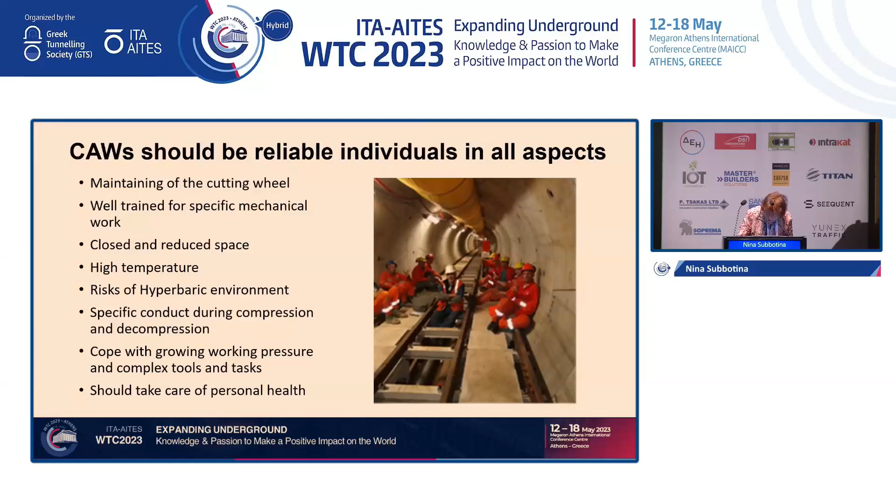In the Riachuelo System Project, Ghella implemented a package of good practices for dry hyperbaric environments that included medical and safety procedures, detailed workers' health studies, vital signs, cardiovascular parameters, and psychology, as well as the records of bubbles in the blood after surfacing in high-pressure interventions.

Why is it important? It is important because while the quantity of circulating bubbles is low, the risk of decompression sickness is also low.

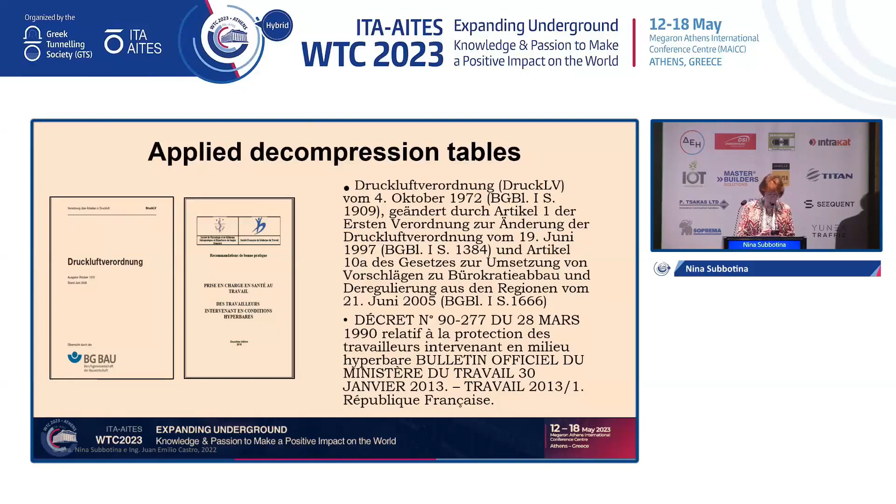In Argentina, for the first time, the German and French hyperbaric protocols were applied, which had not been applied before. Here are the protocols mentioned. So, to justify the use of these protocols and their convenience for application in local environments,

the Doppler bubble registry was used. Echocardiograms and Doppler scanning of the precordial and subclavian zones were analyzed using the Kisman-Masurel score, shown here.

This score ranges from 0, no bubbles observed, to 4, bubbles fill the entire space of the heart chambers. In this video, you can see the heart, and there are some bubbles visible. Those bubbles are grade 2, only grade 2. But the quantity of bubbles is calculated as acceptable when no more than 20% of the bubbles are grade 3.

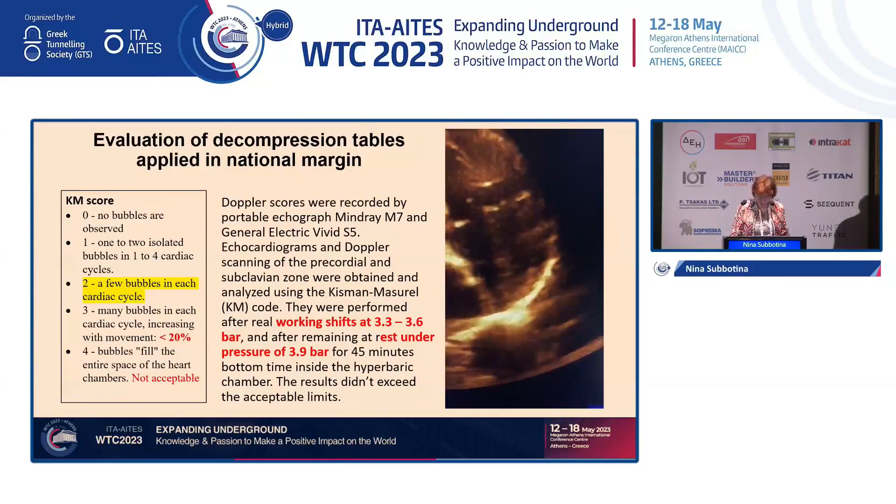Here are the results: average values of vital signs before and after the intervention, and the number of observations. You see that many observations were made. We see that the blood pressure, systolic and diastolic, is slightly lowered after the intervention, and the heart rate slightly increased.

But look at the difference - it is statistically significant only because of the great number of observations. The difference between 120 and 116 millimeters of mercury is 4 millimeters of mercury, which is less than the 5 millimeters considered within the margin of measurement error. So it's statistically significant, but practically, physiologically, it is not important.

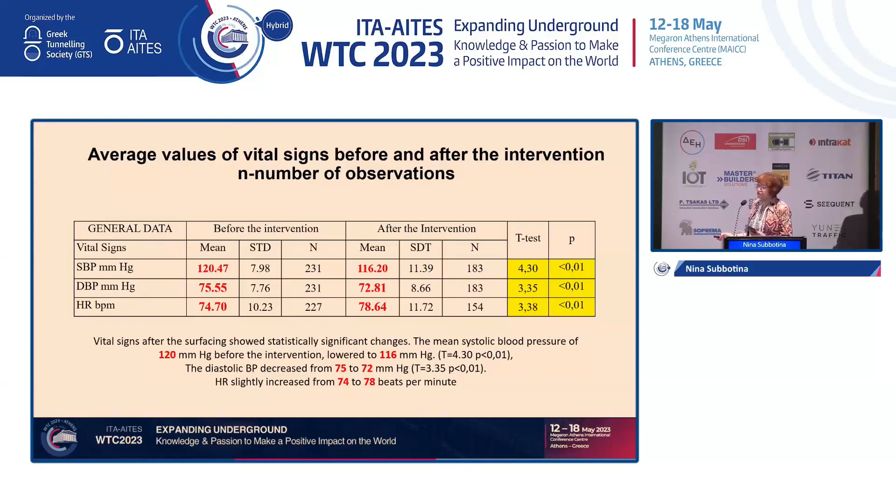Also with the heart rate, increasing from 74 to 78, this has no important physiological significance. So our first conclusion is that the safety of the working environment and the organization of the working schedules was proven. All the physiologic and psychological parameters of the compressed air workers were perfect.

Our experience was analyzed and we wrote it up, presented in these books, one in Spanish and another in English, both available on Amazon.

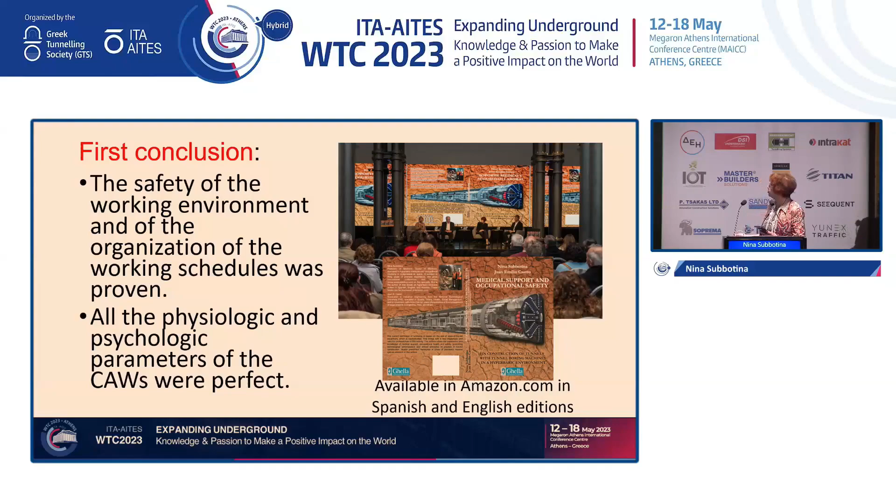We should compare with other studies about the cardiovascular system response to high pressure, but we have not found any data of a similar situation. There are many publications of other working situations, for example in aviation and other types of work, when the work is very stressful and demanding.

So we analyzed two parameters, the duration of the intervention and the pressure. Here you see the total time of intervention: 2 hours, 4 hours, 6 hours, 9 hours. We see that the total duration of intervention didn't show us any differences.

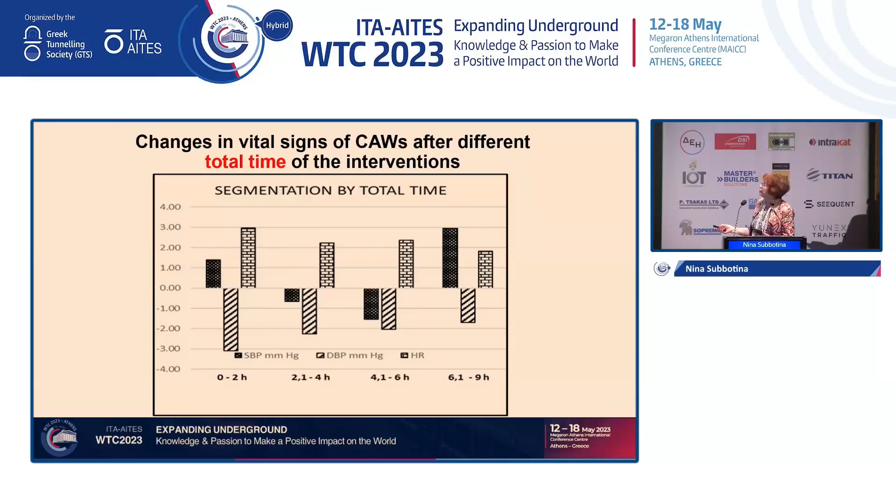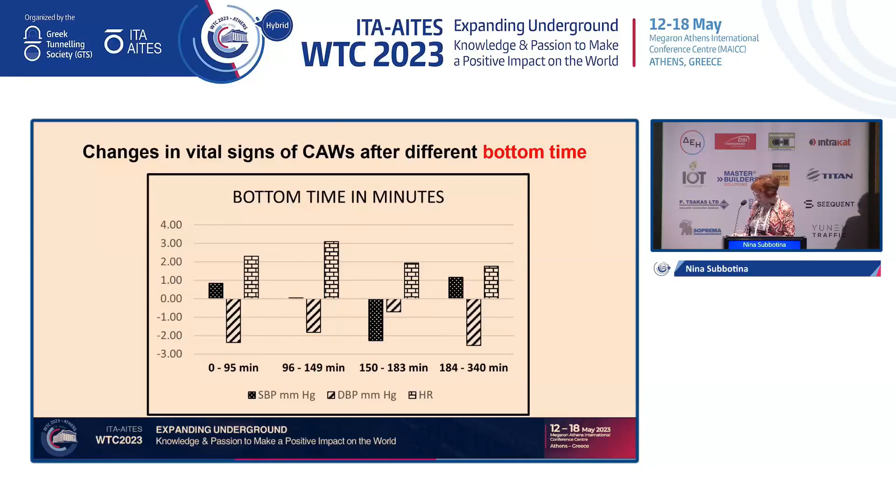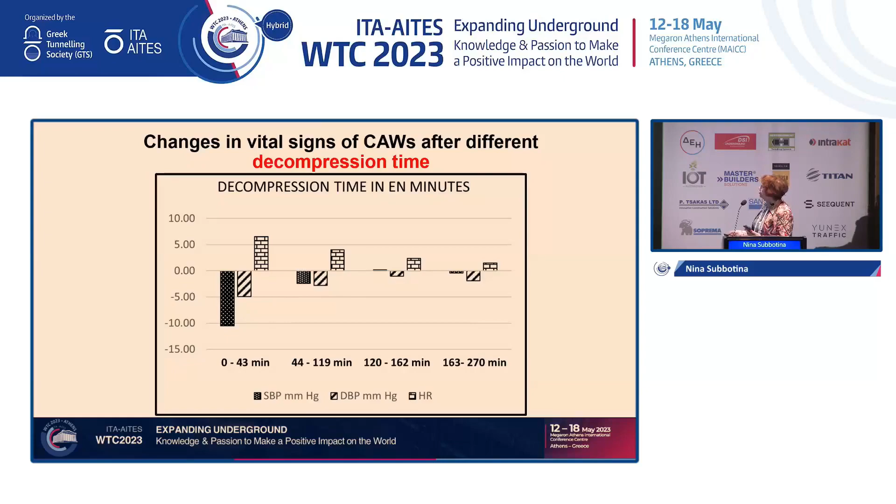The same with the difference of the bottom time - no difference, as we saw in the main slide. But decompression time showed that with less time of decompression there were more changes, and with the most time of decompression, the changes were less.

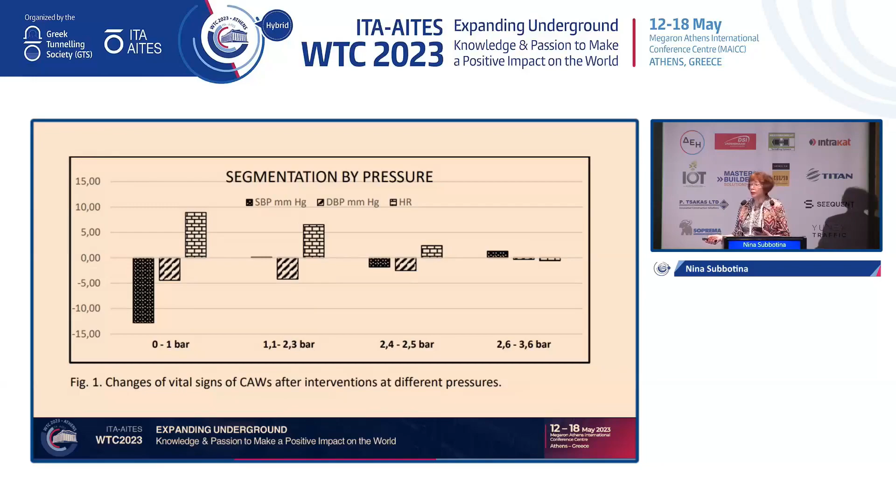And here I put the segmentation of pressure. We see it's the same as the duration of the compression time. Effectively, they are closely linked.

So how to explain it? How does the cardiovascular system respond to high pressure, and which criteria should we apply? The stroke volume and cardiac output parameters are used to characterize working conditions in different demanding and stressful situations.

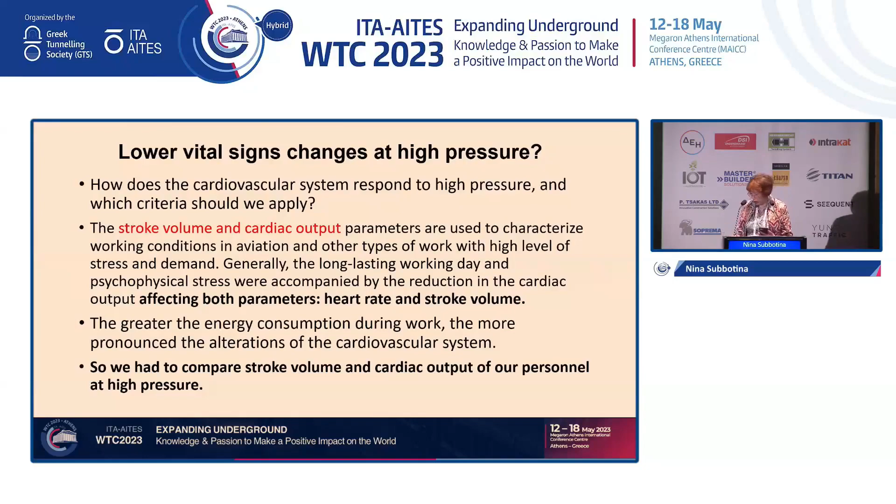It's important that the greater the energy consumption during work, the more pronounced the alteration of the cardiovascular system. So we had to compare the stroke volume and cardiac output of our workers in the different segments of pressure. I will remind you that stroke volume is the volume of blood pumped out of the left ventricle of the heart during each systolic contraction, and cardiac output is the total blood volume pumped from the left ventricle per minute.

According to the bibliography, a long-lasting working day and psychophysiological stress produce a reduction of cardiac output, affecting both parameters, heart rate and stroke volume. But in our group of workers, only 1 of 16 showed a similar reduction.

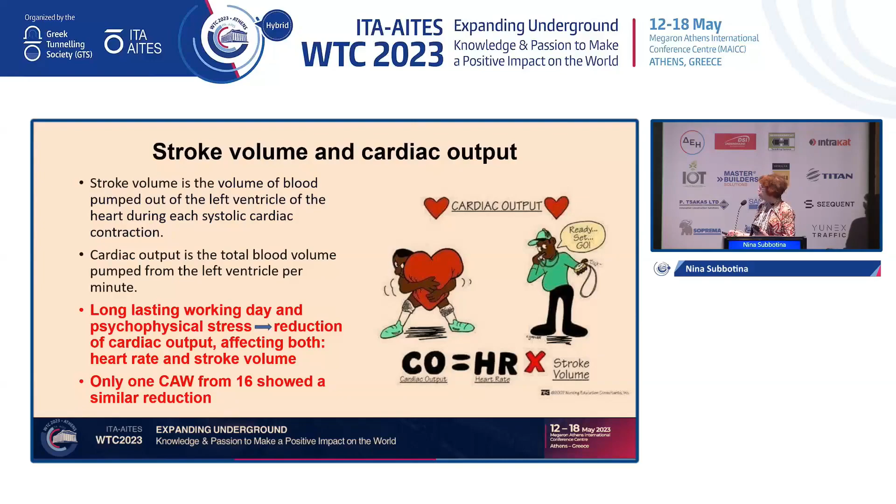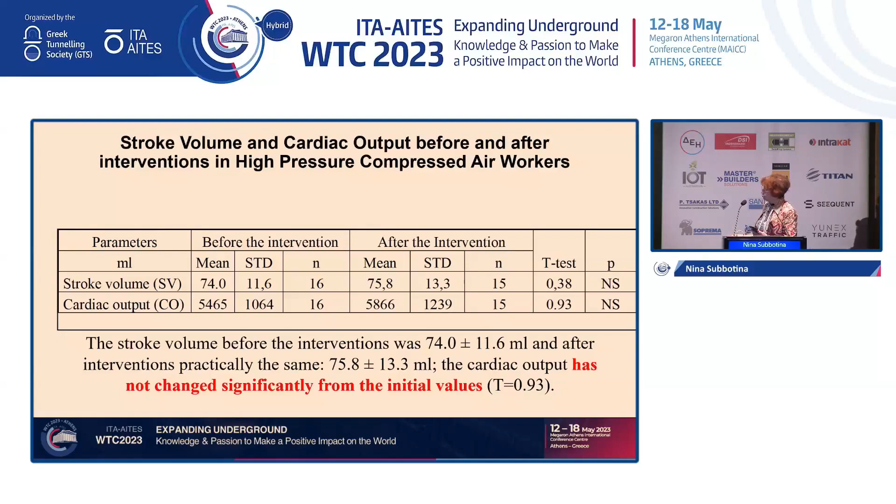Here are the data of the stroke volume and cardiac output before and after intervention of all the group, of all 16 persons. We see that the cardiac output has not changed significantly from the initial values.

What about nitrogen narcosis? Probably it was due to euphoria caused by nitrogen narcosis. The mood registry was done after decompression, but the physician observed the behavior of the workers during the whole intervention, and there were no observed nitrogen narcosis effects in their behavior, and no labor incidents at high pressure.

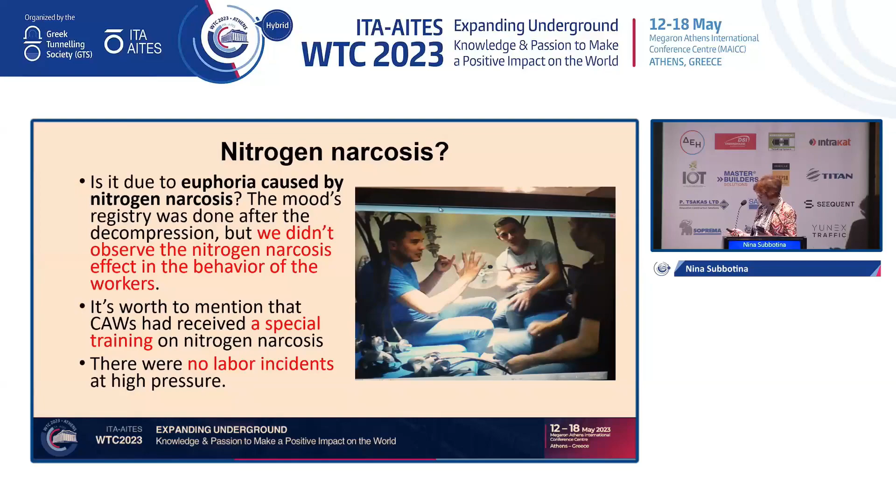What is important is that our workers received special training on nitrogen narcosis. This is the photo - if somebody is interested, I can explain.

Minor changes of vital signs at high pressure could be due to relative hyperoxia. We know the classical work of Eckenhoff, who in 1984 presented that bradycardia is linked to relative hyperoxia and increased pressure.

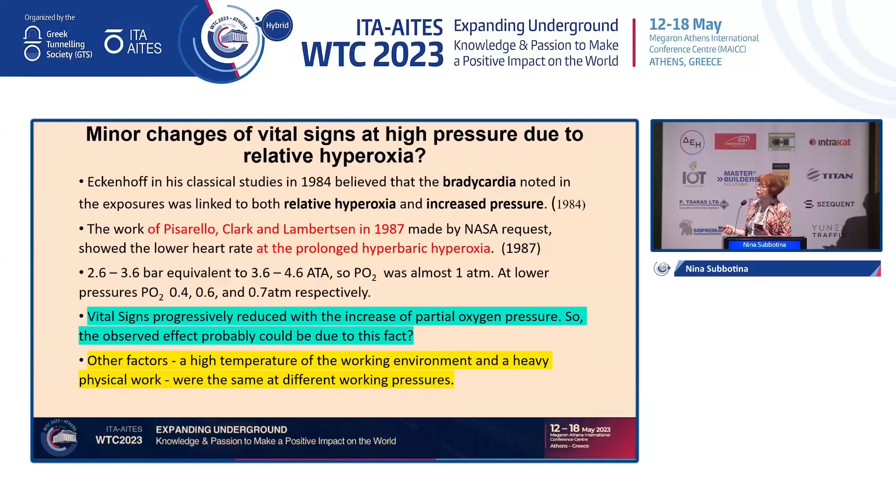Our workers worked at 2.6 to 3.6 bar, equivalent to 3.6 to 4.6 ATA. So breathing air, they had almost 1 atmosphere of oxygen.

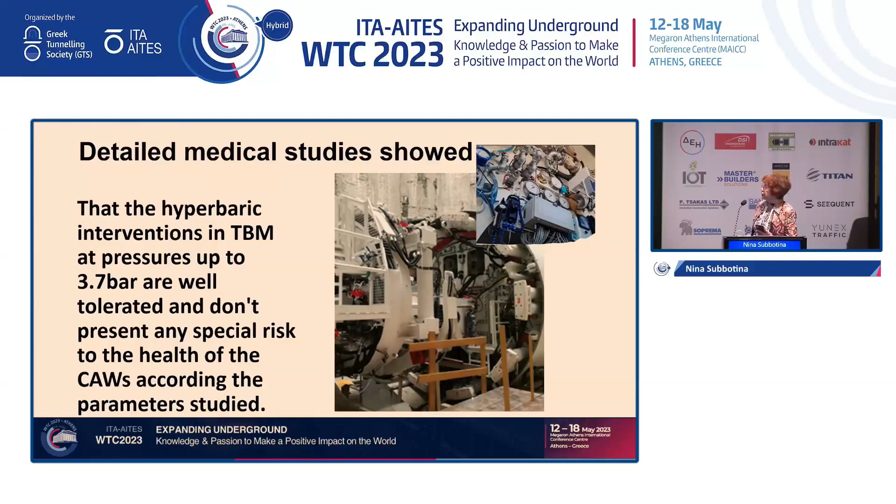Detailed studies showed that hyperbaric intervention in TBM at pressures up to 3.7 bar are well tolerated and don't present any special risk to the health of compressed air workers, according to the parameters studied.

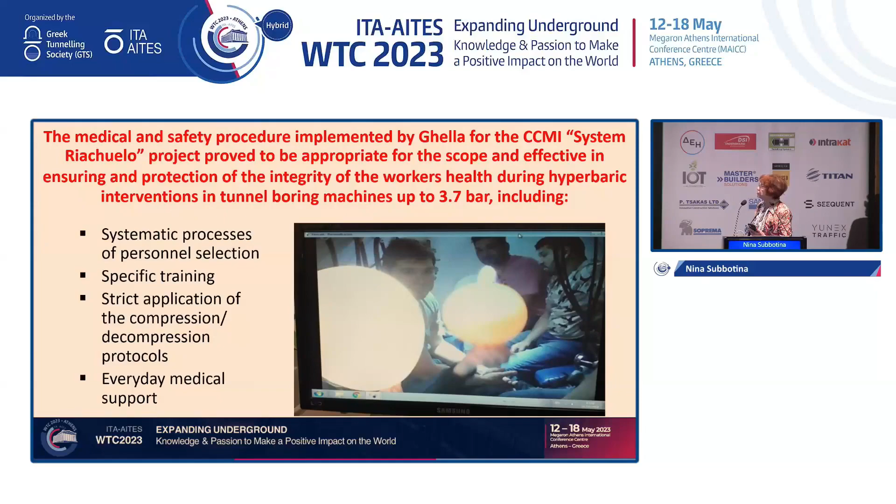All the measures that were implemented by Ghella in the Riachuelo project gave their results: the systematic process of personnel selection, specific training, strict application of compression-decompression protocols, and everyday medical support.

The Ghella Safety and Health Department relied on the analysis of the hierarchy of controls pyramid to carry out these procedures, and the medical studies presented here helped to include the necessary control measures to eliminate or mitigate the risk. This approach ensured that the project was carried out successfully, and the safety and health of the workers were protected.

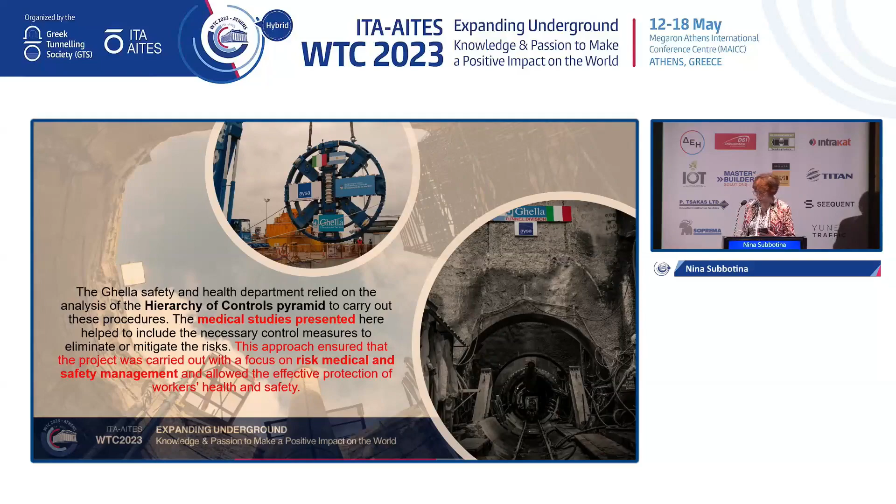Thanks, Dr. Subbotina. Are there questions from the floor? I know that maybe the topic... we are engineers, so we are not so... I have, anyway, a question.

It's just a curiosity, so you can forgive me if I use words not so perfect according to a medical point of view. But when you listed the checks, you also mentioned that mood and behavior are considered for the pretest, yes? Yes. But how... not pretest, not.

Not pretest. The gait and the movement also. If somebody came and has some problems, it's probably the physician observing before the intervention. He will check blood pressure, heart rate, drug test.

You have 15 minutes. Hello, everyone. My name is Despina Papakonstantinou, and I will talk to you today about ASET estimation through fire dynamic simulation for various cases of fire incidents in rail tunnels.

When performing a risk analysis, the first challenge is that there is no specific guidance regarding the selection of fire size and other parameters like fire duration or burning materials. However, these parameters are very important because they affect the available safe egress time, which is the time when the conditions become untenable in a specific space.

So here, several rail fire cases are selected, and a fire dynamic analysis is conducted, and the result of each scenario for the occupants is presented through an index called the fractional effective dose. Also, the influence of the key parameters on tenability conditions is discussed.

In an evacuation analysis, the aim is to ensure that the available safe egress time is greater than the required safe egress time with a margin of safety. FED is used for the determination of the acceptable safe egress time, as it represents the dose received by the occupants in a certain period of time, which may lead to incapacitation and death.

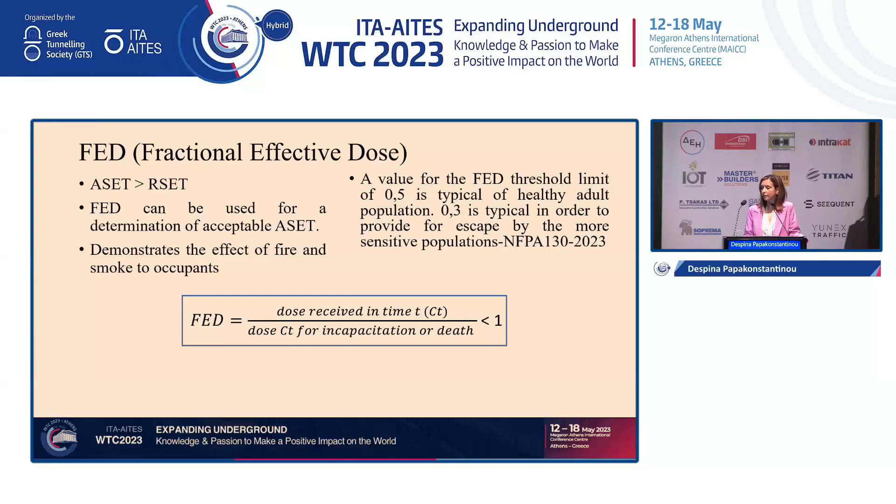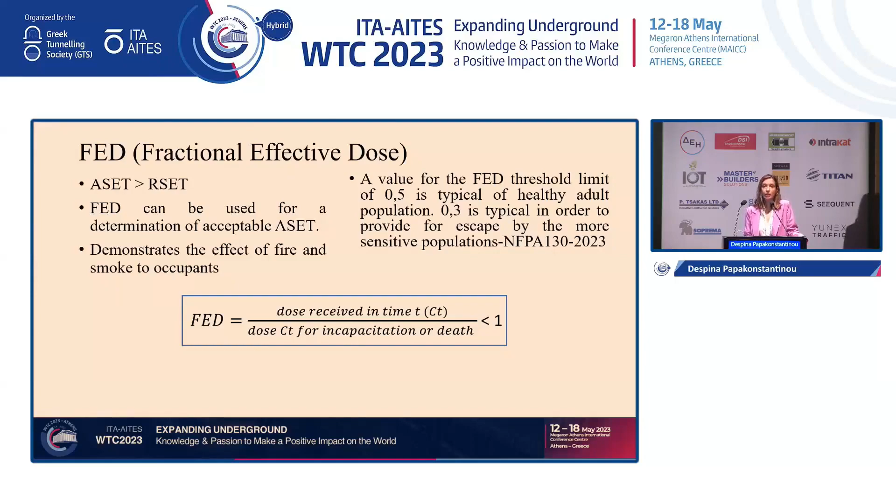As we've seen from the equation, if FED exceeds the value of 1, then conditions become untenable. The standard NFPA 130 proposes a value for the FED threshold limit of 0.5 for the healthy adult population, while 0.3 is a typical limit in order to provide safe egress for more sensitive populations.

So, based on the above, 4 toxicity risk levels were created based on FED of toxicity. This ranges from the desired risk level, meaning the dose of toxic products is too small to cause problems to the occupants' health, to the not-accepted risk level, meaning almost all occupants in a space receive a dose of toxicity which makes them unable to perform evacuation by themselves, in other words, self-rescue.

Since this presentation is oriented to rail fires, I will present some of the main characteristics of fires on rail carriages. The main reasons of ignition are mechanical and electrical equipment failure, which sometimes leads to severe consequences. Also human action, accident, and arson, while rare, has produced some of the most severe consequences in rail fire history.

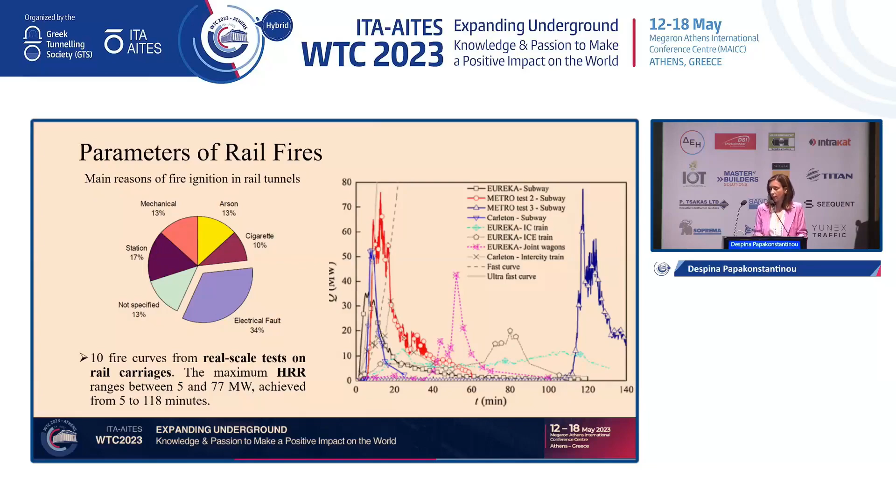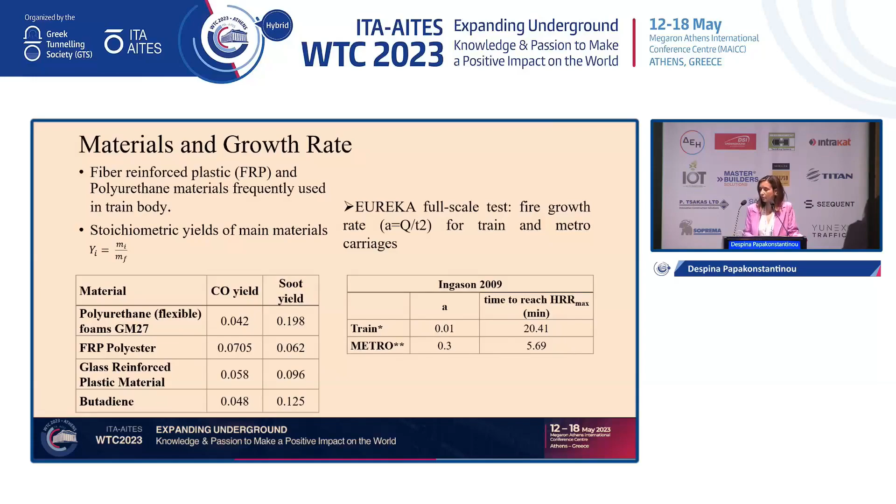And here we have the fire growth rate, which indicates the time when the HRR reaches its maximum value, and that comes from the Eureka full-scale test in a train and a metro carriage.

So a parametric analysis has been conducted in order to identify the parameters that affect the conditions. The calculations are conducted using a fire dynamics simulator, which studies fire and smoke propagation and the effect on fractional effective dose of toxicity, and also the influence of the main parameters.

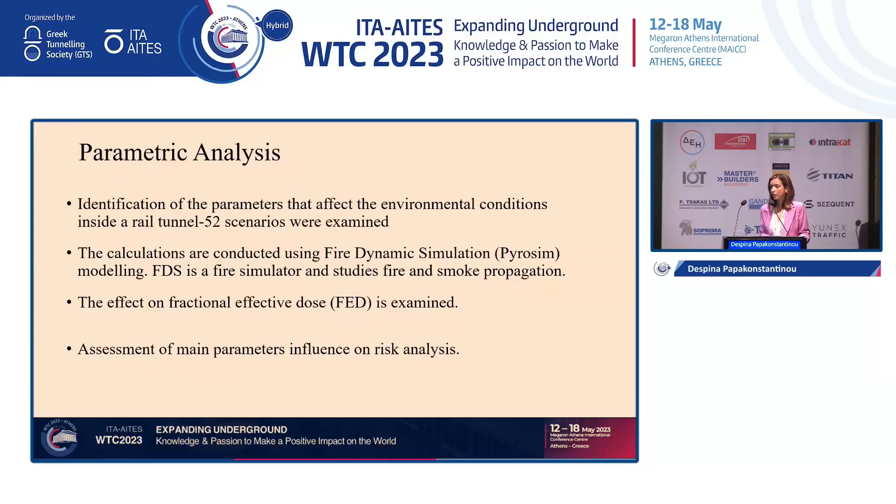Overall, 52 scenarios were examined, but here we will discuss only a few of them. So the parameters considered are tunnel width and height, the HRR max, the fire growth rate, fire decay phase, the combustible material, and the flammable area.

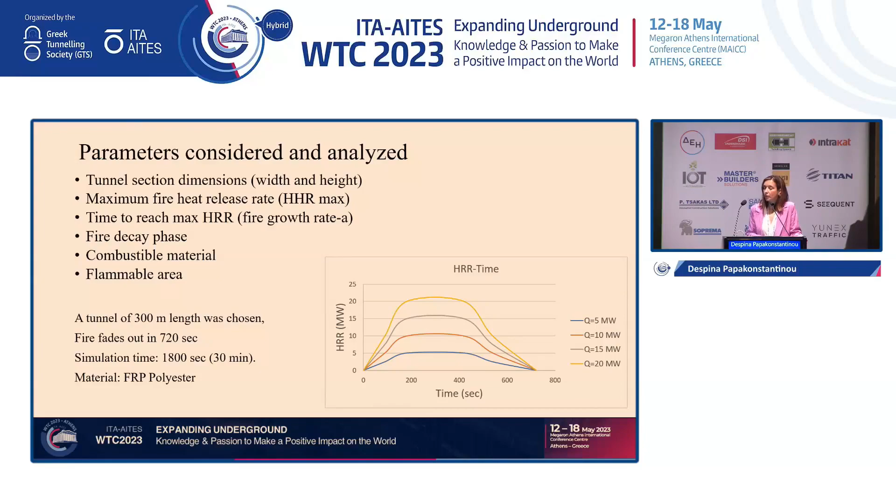A tunnel of 300 meters length was chosen. The fire fades out in 12 minutes. The simulation time is set to 30 minutes, and the main material used was fiber-reinforced plastic polyester. Here we have the fire curves used and the fire sizes.

So 9 tunnel geometries were examined for 10 and 15 megawatt fires, and also an ultra-fast to beyond ultra-fast growth rate was compared. The FRP performance was compared to the material polyurethane. The decay time was extended from 12 minutes to 30 minutes, and the combustible material area was set from 10 to 20 square meters.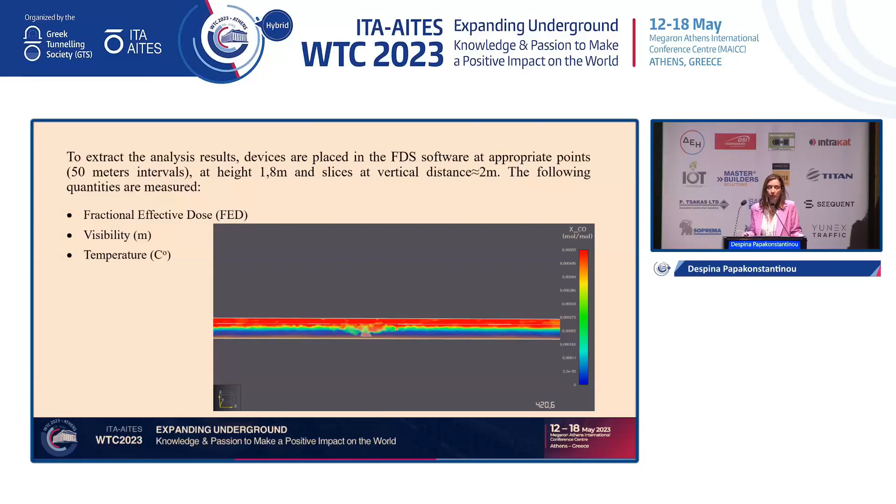To extract the results, the FED toxicity was measured at appropriate points with a distance of 50 meters between them at a height of 1.8 meters. Here you see the 3D model and the stratification of the smoke inside the tunnel, and the carbon monoxide concentration at 7 minutes after fire ignition.

So here we move to the results of the analysis. First, we have the effect of HRR and geometry on FED toxicity. As we see, the smallest geometries, especially tunnels with a height of 4 meters, produce the highest FED values. Also, the increase of HRR from 10 to 15 megawatts has a substantial effect on the fractional effective dose.

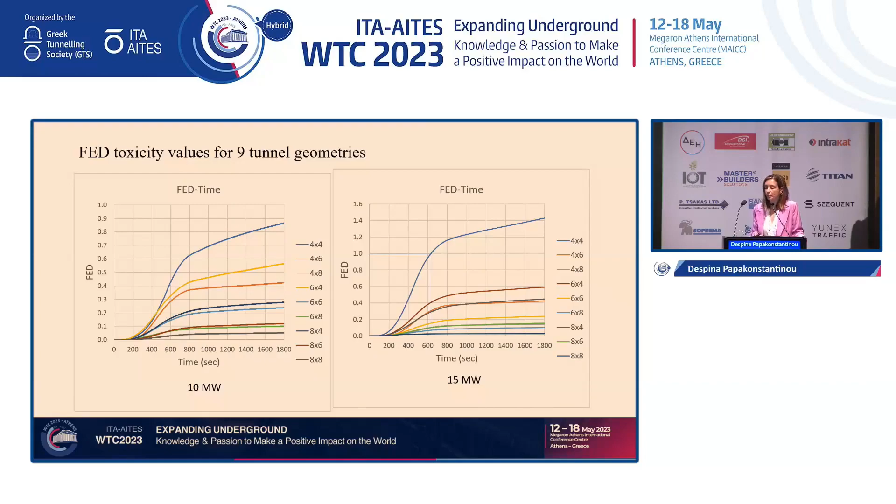This is very important for metro tunnels, which are smaller than our tunnels. We see that even a small change in HRR has a great effect, and for a height above 8 meters we are on the safe side according to NFPA 130.

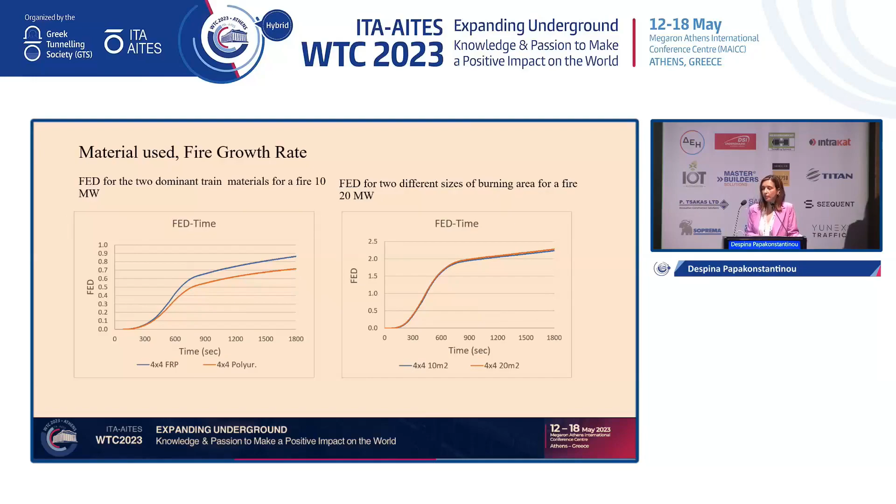Here we have the comparison of the two materials, and as we see, the FRP presents a higher FED value than polyurethane, as it has a higher stoichiometric yield of carbon monoxide. And in the second chart, we see that the size of the burning area doesn't have an effect on FED as long as the fire size remains the same.

Here we have the two different fire growth rates, and as we see, even the fire growth rate doesn't have as great an impact as geometry or HRR. It has an effect on the fractional effective dose, and it should be taken into consideration, especially when the FED curve lies near a threshold limit.

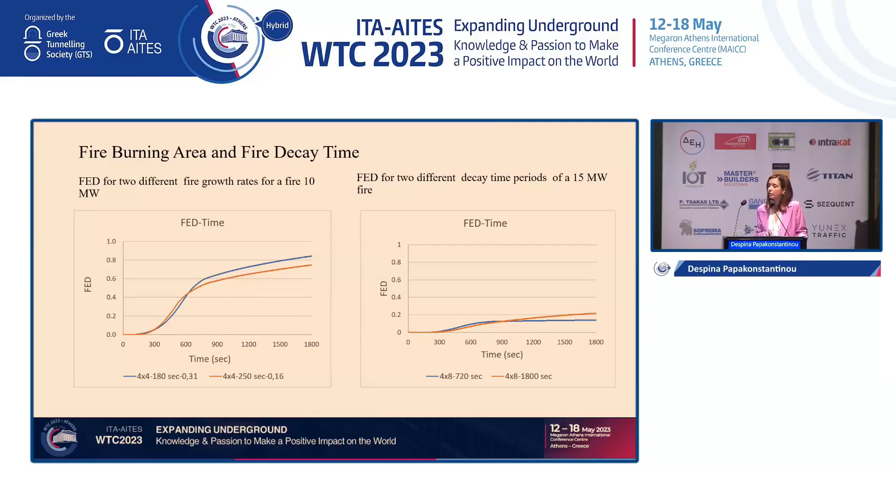Regarding the decay phase, we see that when the fire lasts longer, the FED is higher, and the FED curve changes as FED continues to increase with time.

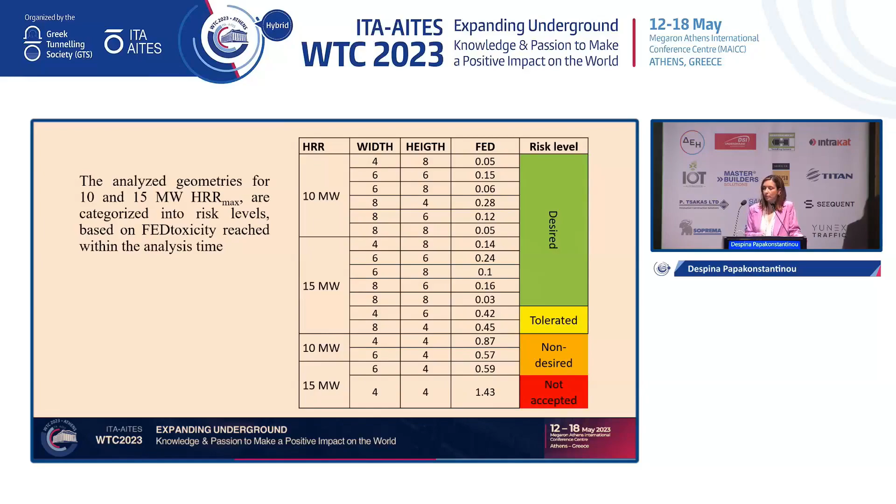So the analyzed geometries for the two fire sizes are categorized into risk levels based always on FED toxicity. The performance of each scenario is a combination of each geometry and the HRR max. As we see, the tunnel section with height 4 meters belongs to the non-desired, not accepted risk level, while only 2 scenarios analyzed with the 10 megawatt fire don't belong to the desired level of risk.

And here I have the FED for the scenario where the fractional effective dose exceeds the threshold values during the analysis time.

Here we see that the FED value of 0.3 is reached between 5.5 and 10.5 minutes. The FED value of 0.5 is reached between 7 and 20 minutes. And only one scenario resulted in FED 1, at about 10 minutes.

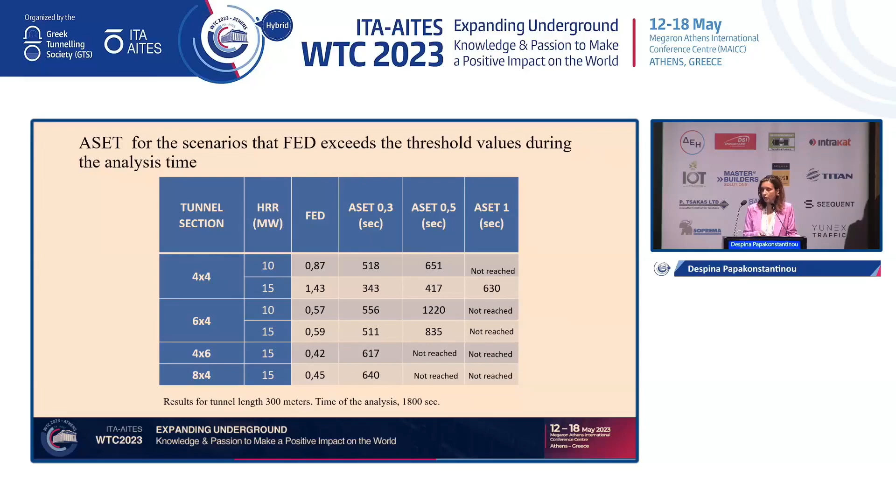So we move to the conclusions. As we said, the tunnel height plays an important role on toxicity conditions, especially for higher maximum HRR values. Specifically, for the same section area, FED is 37% higher for the section with the lower tunnel height. So to maintain safe conditions for passengers during an evacuation, good practice would be to have a tunnel with a minimum height of about 6 meters.

The burning material, the fire growth rate, and fire decay period have a considerable impact on FED and affect the results on toxicity level. These parameters interact with each other, so they cannot be considered separately during an analysis without taking into account the values of the other parameters. So the engineer should take into account all these parameters in order to select a representative fire during a risk analysis, through an FDS analysis using the appropriate scenario, ASET can be estimated for various types of underground spaces.

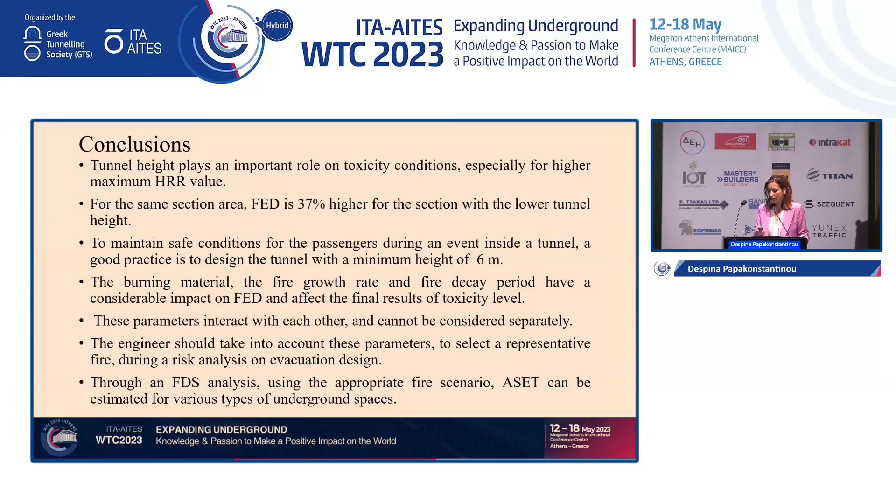Here, for the cases we saw that within a time frame of 5 minutes the threshold limit of FED wasn't reached, so we could say that was an available safe egress time. Thank you for your attention.

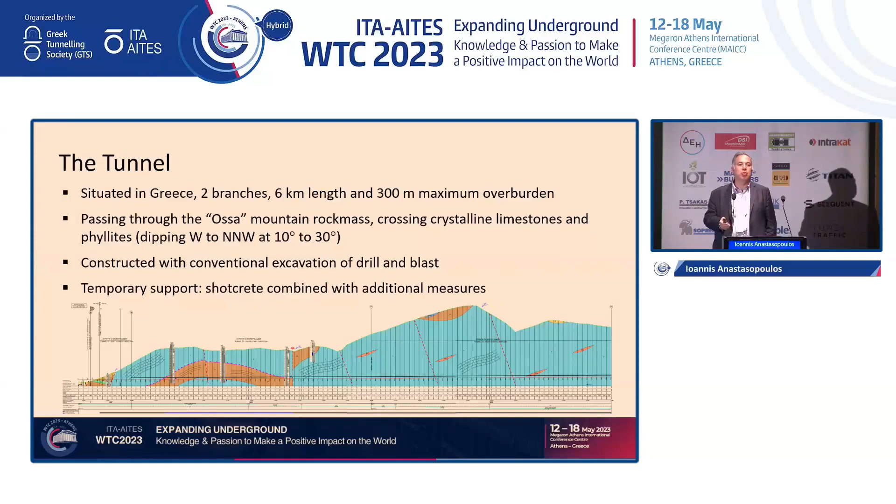You see here a cross-section. I will not say a lot about this. It was constructed with a conventional method of excavation, drill and blast, and the temporary support had shotcrete combined with some additional support measures, which I will not talk about. The final lining, and this is our problem, this is where the problem came.

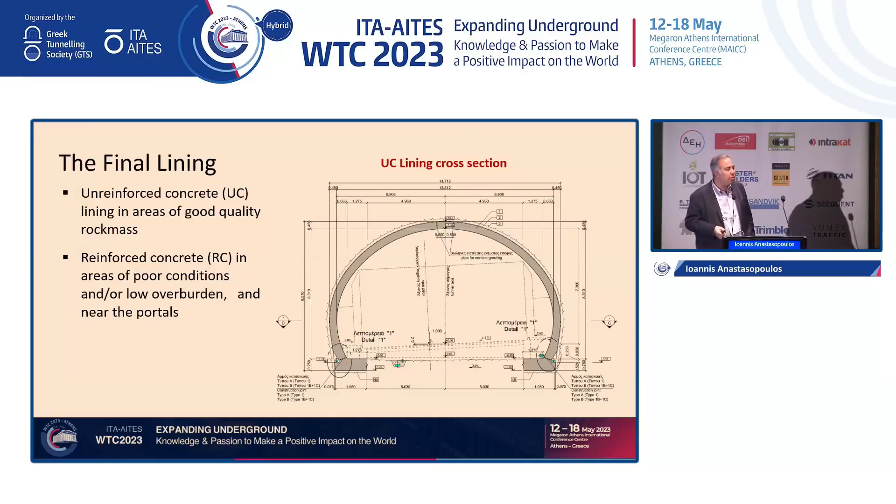There were 2 areas of the tunnel. The first area, let's say, where it was crossing good quality rock mass, it was unreinforced concrete. When the quality of the rock mass was worse, it was reinforced. So the tunnel was designed, it was approved, it was constructed, and after it was constructed, the owner of the project disputed the seismic safety of the tunnel.

There was an expert, a structural engineering expert, that was hired by the owner. He, I shouldn't say he, because this is revealing something, but anyway, the expert conducted a pseudostatic pushover analysis, and assuming elastic response, in this study it was shown that the tensile stresses of the lining for the case of seismic loading exceeded the tensile strength of concrete, and it was concluded that the lining is insufficient. And the question is what you do in such a case. It's already constructed. So you demolish and construct again another lining with reinforcement.

So then at this stage we were appointed by the contractor to conduct a more, let's say, sophisticated study. Of course, this is more than 10 years, almost 15 years ago. So perhaps today some of you will say this is not sophisticated anymore. But at this time it was as sophisticated as we could do.

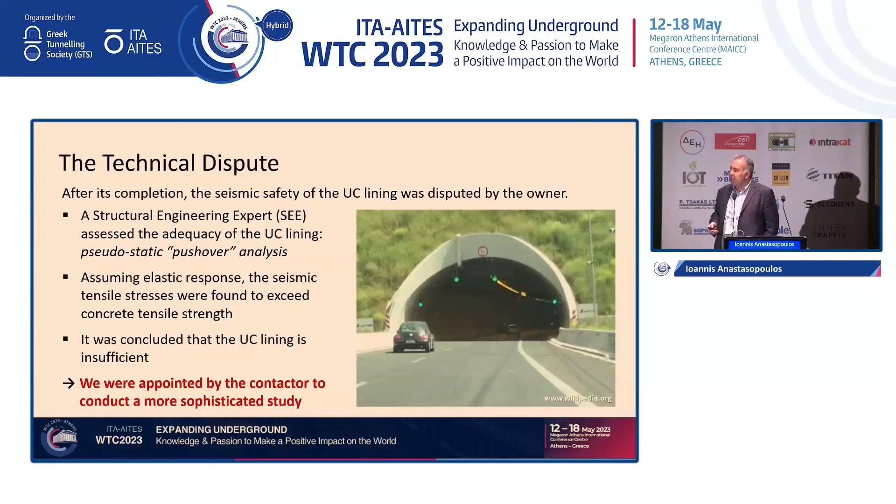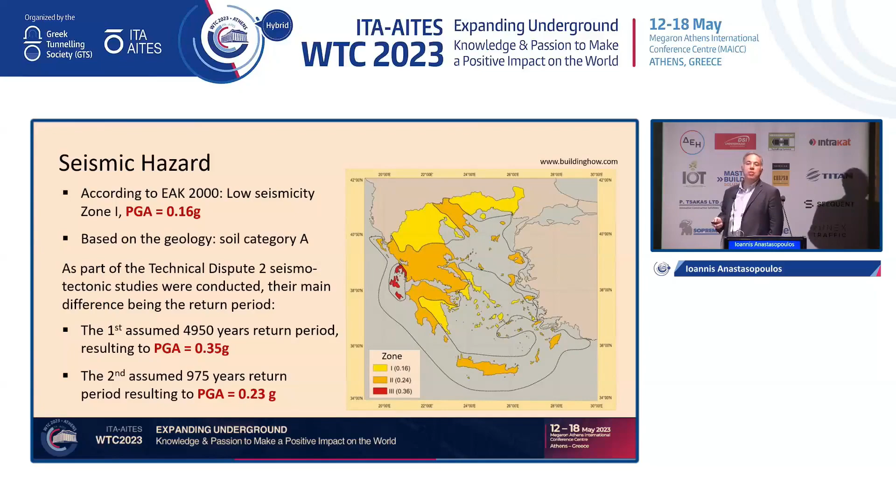As part of this court case, two seismotectonic geology specialists were appointed to conduct studies and tell us what PGA we should take into account. The first assumed a very large return period of almost 5,000 years, resulting in a PGA of 0.35 g. The second assumed only 975 years return period, leading to 0.23 g. So which one is correct? One is more conservative, the other less conservative.

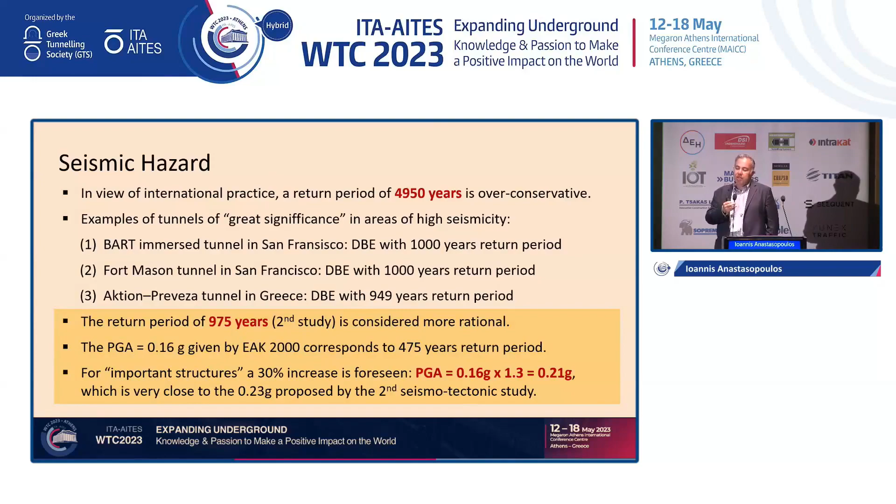In view of international practice, we did our own assessment. We thought 5,000 years was a bit over-conservative, and there are several examples. For instance, the BART immersed tunnel in San Francisco, a very important tunnel, was designed for a 1,000 year return period. Another example, the Aktion–Preveza Tunnel in Greece, in a very high seismicity area, used 949 years. Based on this, we thought the 975 year return period, leading to 0.23 g, is not a bad assumption.

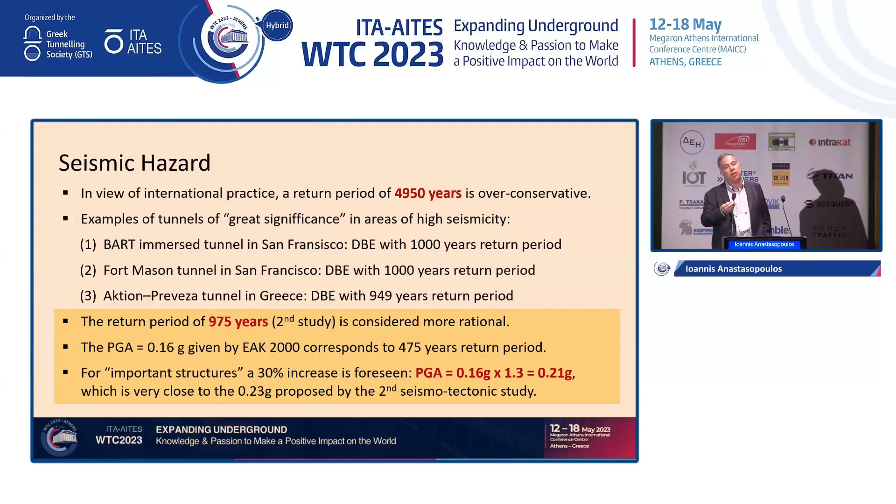This is what our study was based on mostly. Of course, for important structures like this, if you assign the 30% increase based on the Greek seismic code, then 0.16 multiplied by 1.3 gives you 0.21, which is very close to the second seismotectonic study. So that's enough on PGAs.

We need to come up with seismic shaking scenarios, so we have a two-step procedure. First, we start with attenuation relations, some of the most well-known. With these attenuation relations, you can go from the assumed magnitude of the earthquake and distance from the second study, and come up with spectral accelerations using these relationships.

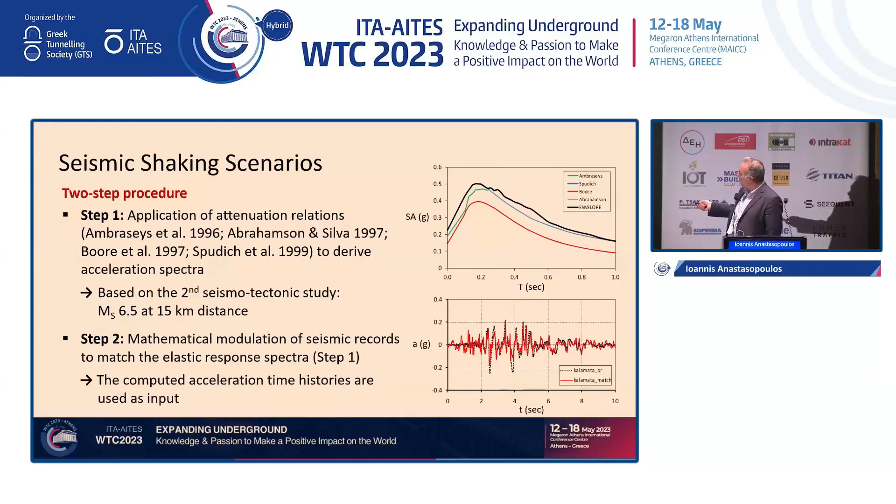The second thing you can do is take records, real or artificial, and do some mathematical modulation. With this massage of the records in the frequency domain and also the amplitude domain, you can come up with records that match the spectra of this specific study.

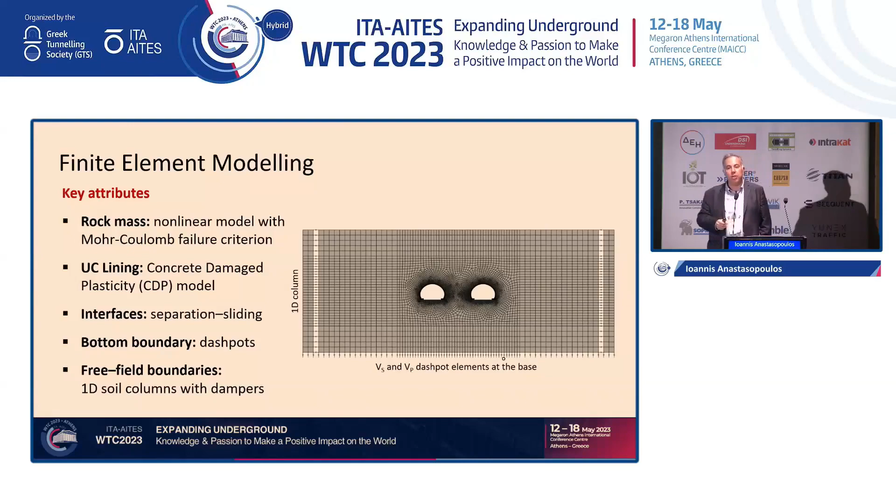We need a model, a finite element model in this case. The rock mass was modeled with a nonlinear model obeying the Mohr-Coulomb failure criterion. The lining, and here comes the novelty of this study, uses the concrete damage plasticity model, CDP. There are interfaces that allow sliding and separation, and what you see here, these 1D columns, are free field boundaries that allow proper modeling of a dynamic shaking problem.

We didn't know exactly how much the convergence was. In the original study, we had to be compliant with it, where it was assumed that the tunnel had a pressure of 180 kilopascal. This is important because we're talking about a nonlinear analysis, and the pressure coming to the tunnel from the surrounding rock mass will make a difference to the dynamic response.

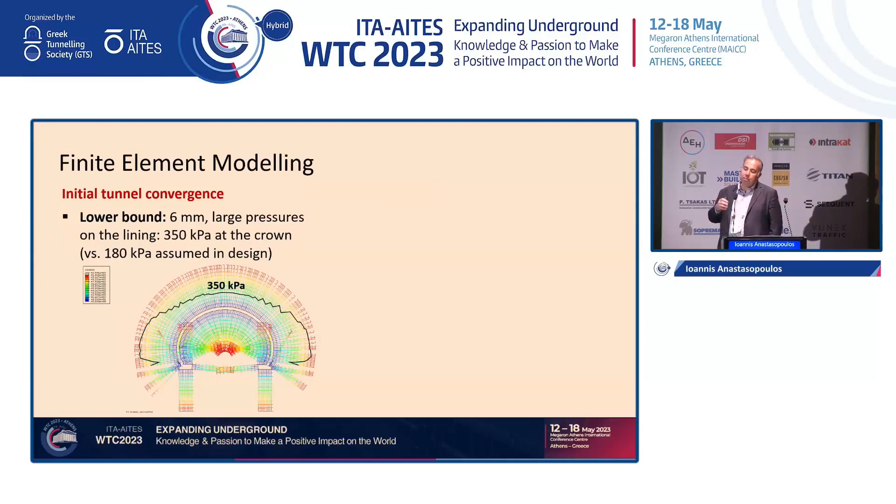For this reason, we considered two different cases, a lower bound and an upper bound. The lower bound assumes 6 millimeters of initial convergence, leading to 350 kilopascal of pressure at the crown. The other assumes 14 millimeters, a bigger initial convergence, which means less pressure going to the tunnel.

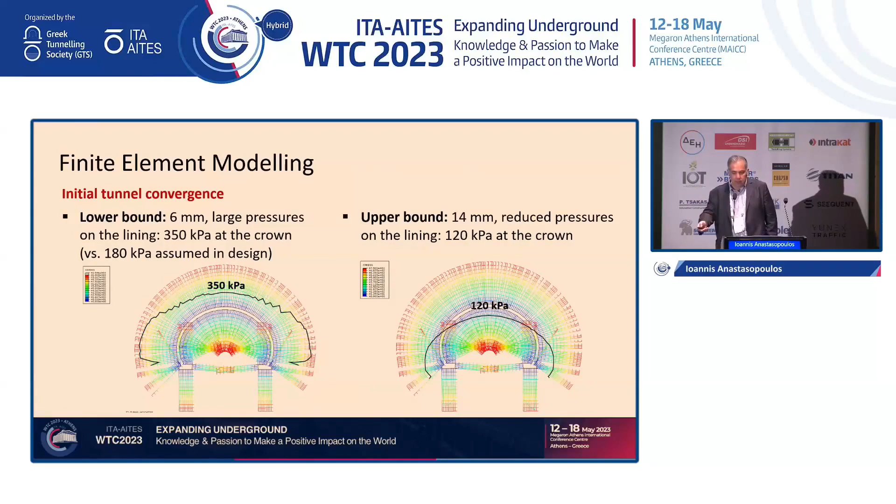The concrete damage plasticity model combines isotropic damage elasticity with tensile and compressive plasticity, so it can model what happens to the concrete. You see here, as an example, the stress-strain curves for confined concrete, the red curve, and unconfined concrete. Here we have mostly the unconfined case because there's no reinforcement, which is why things are worse.

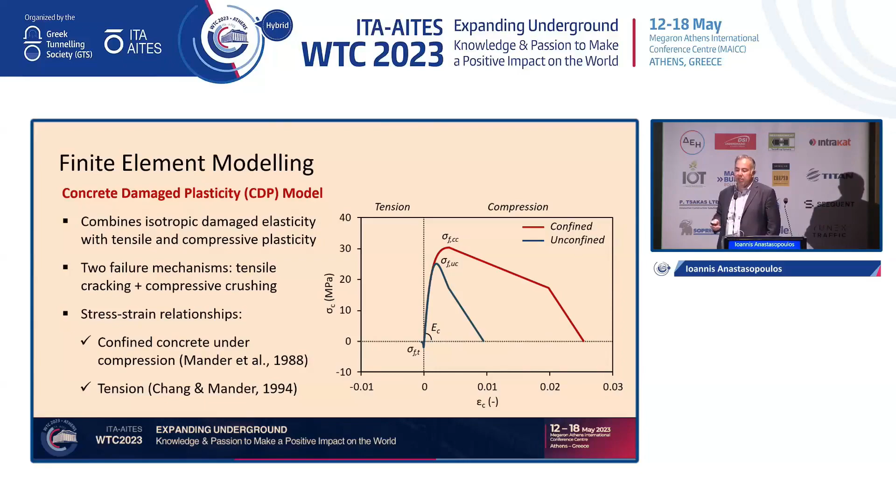How do we know this works? We know because we've done validations, and you see here an example against the so-called cross-section analysis. The blue line comes from a cross-section analysis. The red lines come from calibrating this model and running the same test in Abaqus using the CDP model, and we get a good comparison.

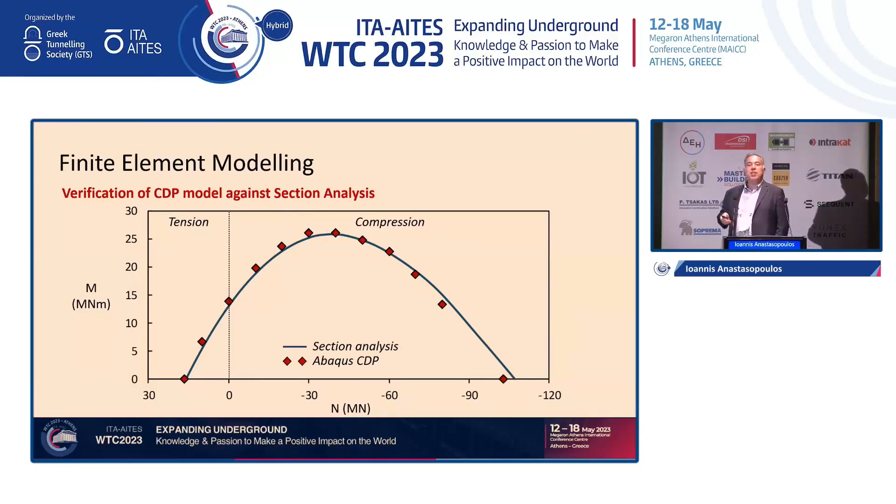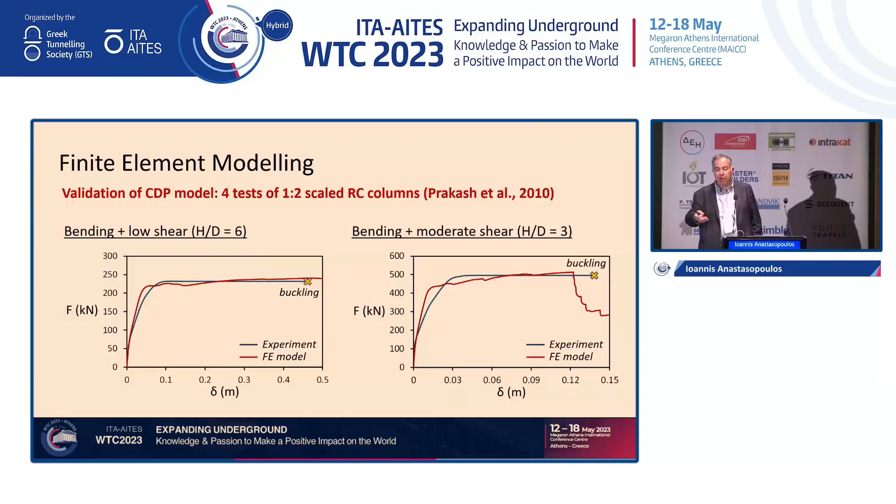So at this stage, this is what we had. But more recently, as part of the PhD of Anastas Zagalianos, we did additional validations. You see two examples here in terms of force-displacement response for two different cases: bending with low shear, and bending with moderate shear. The model looks good. This is newer work, but it's a confirmation that what we did back then was not that bad.

Analysis methodology: we did two different things. First, the so-called pseudostatic pushover analysis, where we apply to our model an angular distortion in a pseudostatic manner. We computed this angular distortion gamma for both cases, 0.24G according to the second study, and 0.35G for the more conservative seismotectonic study. The second set of analysis is dynamic time history analysis, which is better and closer to what happens in an earthquake, but we wanted to do both to also compare our results with what the structural engineering expert did.

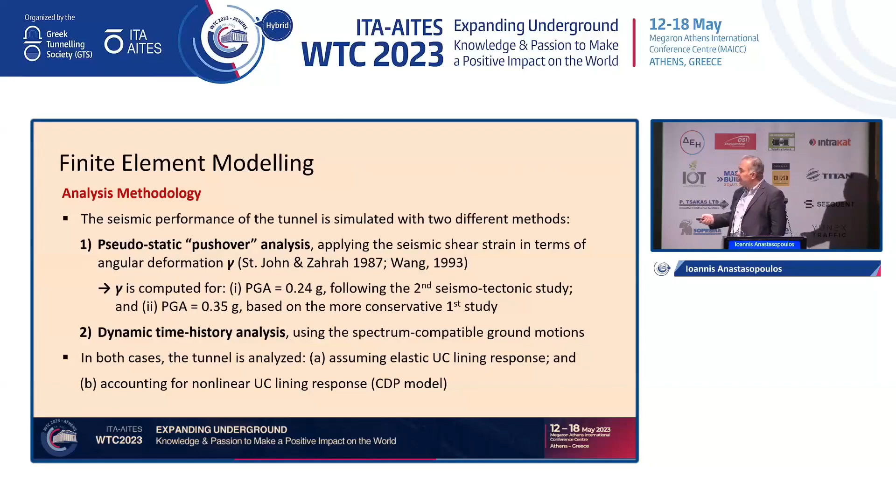In both cases, we assumed both elastic lining response, which is not realistic but consistent with what was done by the other expert, and nonlinear lining response with a CDP model calibrated as shown previously.

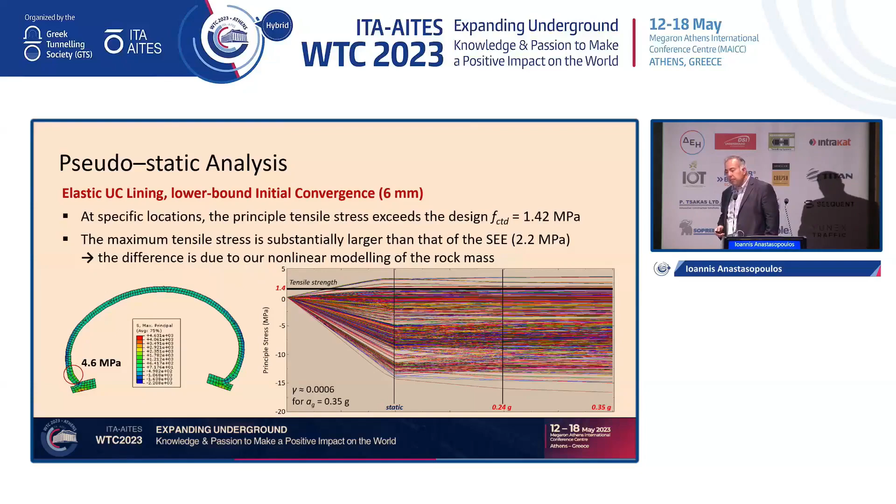So this is with elastic analysis. Everything until here is to be consistent with the structural engineering expert. The second thing we did is analyze the tunnel standing alone, as was done by the other expert, applying a pushover analysis, with the lining now non-linear according to the CDP model. If this is the force displacement response, you see that at about 1.7 millimeters it fails. This is consistent with what the previous expert showed.

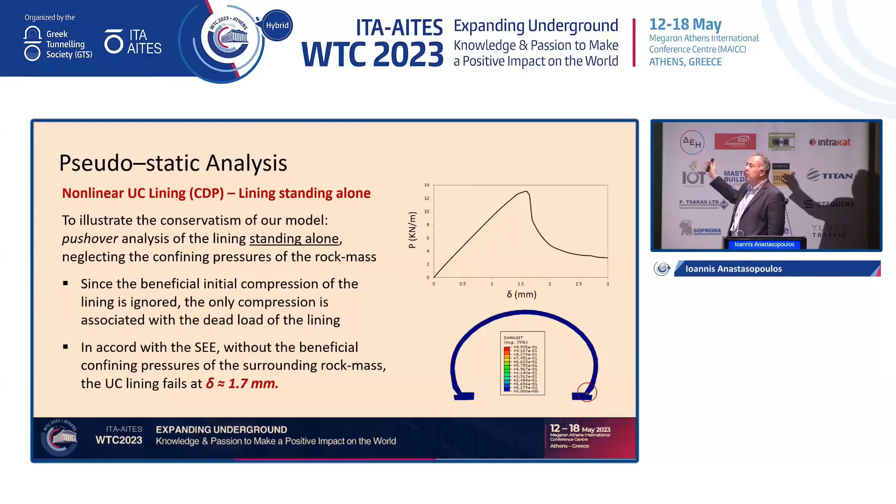There is a crucial thing missing here: the surrounding rock mass. This is the tunnel as if it was an overground structure, with no surrounding rock mass pushing radially on the tunnel. This is a pushover as if the tunnel lining was a building. So at 1.7 millimeters it fails.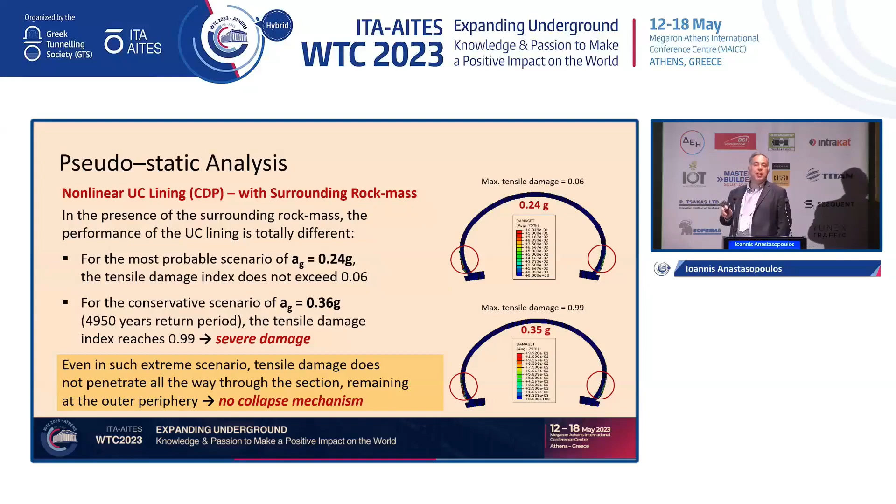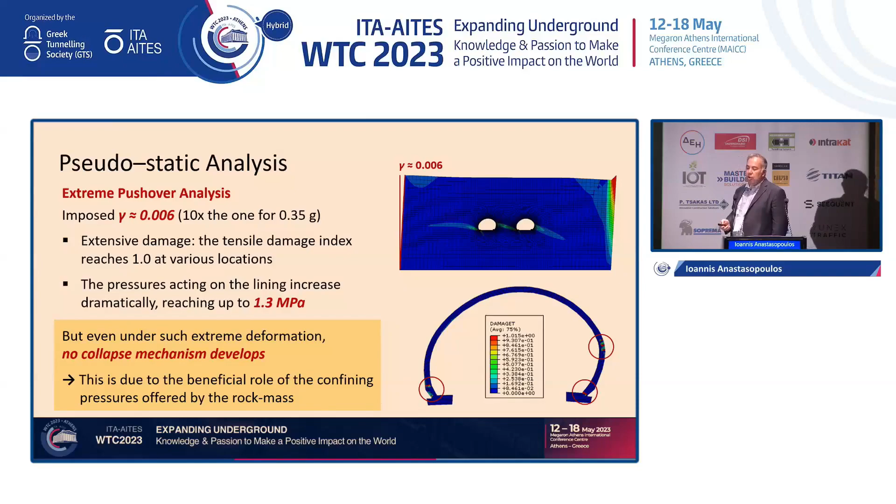We did something very extreme to see what would happen. This angular distortion here, for 0.35G, the most conservative scenario, had one more zero taken out, so we applied a very extreme scenario, 10 times the angular distortion computed for the more conservative 0.35G scenario. Even in this very extreme analysis, we have similar conclusions: more damage in more locations, but still no collapse mechanism develops in this case.

The best analysis we could do is the dynamic time history analysis. This is done with the Kalamata record fitted to the attenuation relationships and spectra we saw previously. We see now a maximum drift of about 5 millimeters. The permanent drift is negligible, so it recenters. The tensile damage in this case reaches, at some locations, 0.16 — you cannot even see red now — where 1 is bad, so 0.16 is some tensile damage but not really severe.

Professor, just one minute left.

I know, thank you. So we have cyclic degradation effects leading to a somewhat different response, but it is still okay. The tensile damage does not penetrate deep into the lining, and we don't have any collapse mechanism.

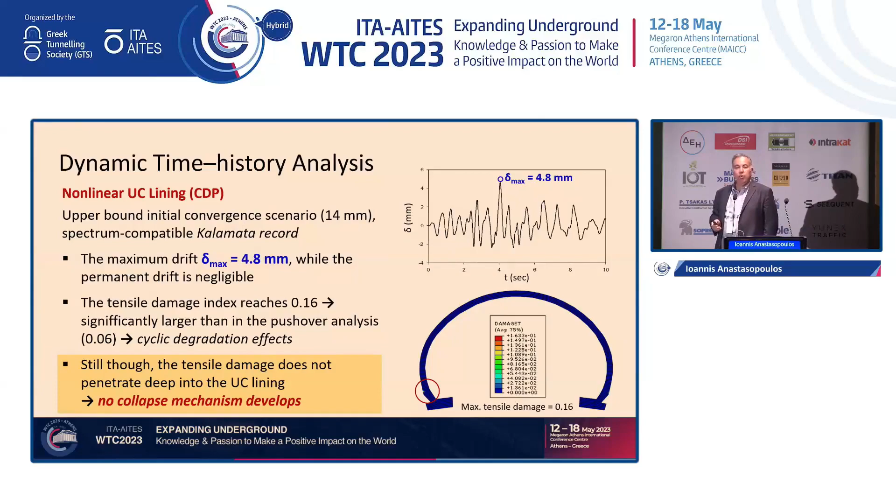So moving to the conclusions, in my last few seconds, we saw that without the beneficial confining pressures of a rock mass, the lining would fail in merely 1.7 millimeters if you treat it like a building. However, if you take account of the beneficial effect of a rock mass, things are much better, no collapse mechanism develops. There is some damage, of course, but this is tolerable.

And thanks to our study, which does account for the confining pressures and the dynamic nature of the loading, it was possible to settle this technical dispute in a rational manner. And most importantly, it was possible to avoid adding reinforcement to an already constructed tunnel, which would have been extremely challenging, costly, and very resource intensive, even if it was possible.

So with no delay, thank you very much for your attention, and I will be happy to answer questions.

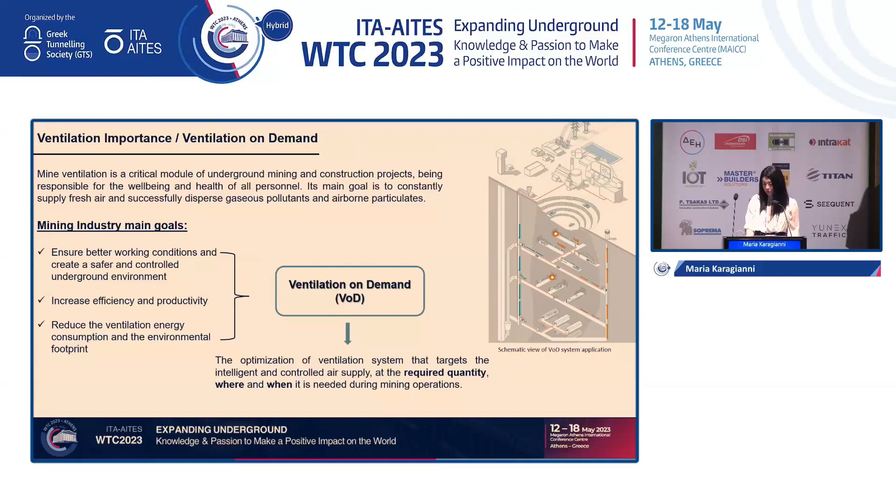And machine learning techniques have great accuracy to do that. Of course, machine learning is nothing else but a branch of artificial intelligence and computer science, which focuses on the use of data and algorithms to imitate the way that humans learn and gradually improve its accuracy. In fact, machine learning as a discipline aims to design, understand, and apply computer programs that learn from experience for the purpose of modeling, prediction, or control.

There are three main methods: supervised, unsupervised, and reinforcement learning. In our case, we choose to use supervised learning because we know exactly what are the target values that the algorithm must predict, and these values are very well and strictly defined by the strictest standards in effect for mine ventilation.

From the machine learning techniques, we choose to use artificial neural networks because of their ability to learn and process large amounts of data in a short time frame, the capability of fully readjusting the parameters and continuously improving the algorithm, and of course their great performance in dynamic evolving situations, such as underground mines, in which the needs of ventilation change as the exploitation progresses.

An ANN consists of the input layer, one or more hidden layers, and the output layer. These layers are interconnected with a specific number of neurons that transfer the signal. The way that all neurons connect to each other is called topology, and it's one of the most important features because the architecture, or topology, determines the capabilities of the ANN.

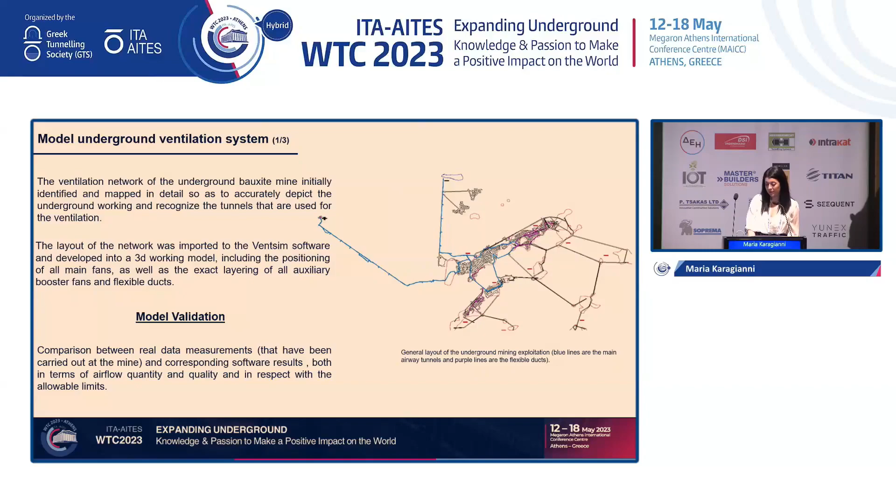A section of the mine was chosen in which there are two productive tunnels, the ventilation of which is provided by the same fan that supplies them with the required airflow. In both tunnels, diesel equipment is working with a corresponding number of personnel.

In addition to the airflow quantity, the analysis is also made on the air quality characteristics of the selected section. In these diagrams, you can see the results of a 7-hour simulation with respect to the gas pollutants that perform at the working areas. As shown, all concentrations are stabilized after the first 3 hours of simulation, while remaining within the limits.

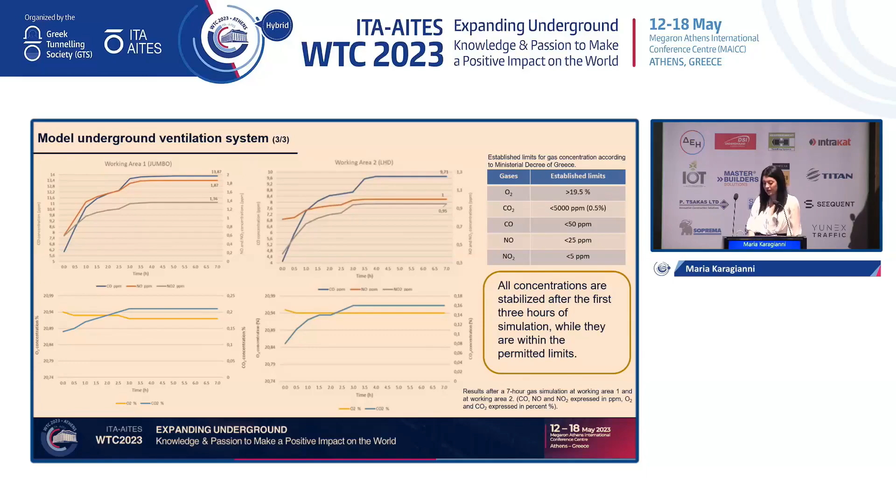So, passing now to the development of the ANN model. The aim of the model is to adjust the characteristics of the fan and regulators in order to achieve the optimal air conditions by predicting the nitrogen oxide concentration.

The implementation was made through the use of a feed-forward artificial neural network, with the algorithm written using the Python programming language. The input data are the airflow of the fan and the openings of the regulators, and the output data are the gas concentration of the two working areas.

The dataset consists of a total of 229 records for each group of data, with 80% used for training and 20% for the test set. Also, the accuracy of the generalization of the model was evaluated based on the relative error between the predicted and the actual value of the gas concentration.

After many tests to find the optimum topology, the best model architecture structure had 3 input neurons. The first hidden layer consisted of 45 neurons, where a 20% dropout rule was set, followed by 3 hidden layers with 35, 20, and 10 neurons. Finally, we have 2 output neurons assessing the gas concentration.

As for the functions, ReLU is used as the activation function throughout the model, followed by a linear function in the output neurons. We also chose the Adam optimizer, which is a method for stochastic gradient descent in order to adapt the learning rate for each weight of the neural network. And for stopping the training process, we set as requirements either the completion of 2000 epochs or the achievement of the minimum mean squared error in 50 consecutive checks.

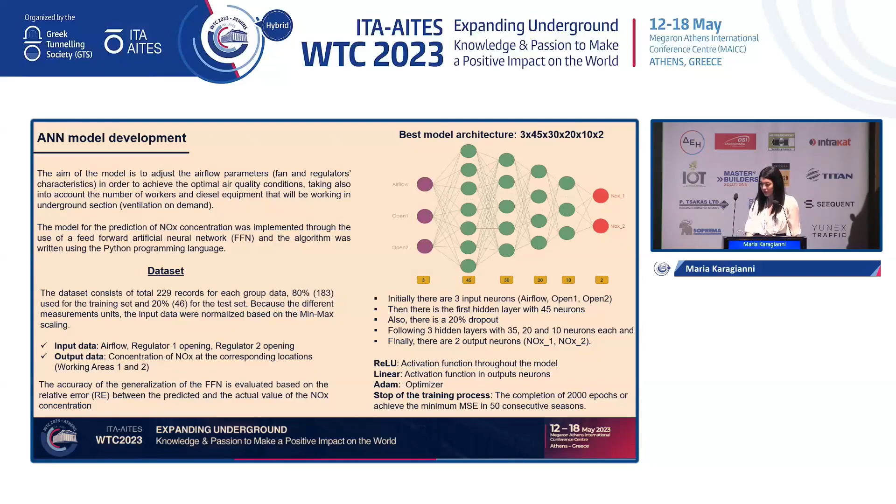At the end of the training, the main task is to check the general behavior of the model. If the ANN responds satisfactorily, for example if it follows the trend of the data and doesn't focus on a specific group of values, it means that it's capable of reliable predictions.

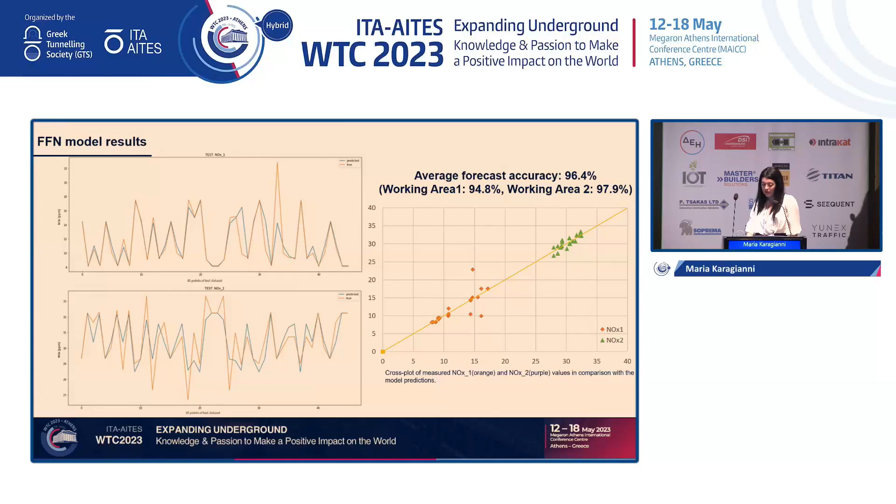More specifically, the ANN's generalization has an average forecast accuracy of more than 90% for each corresponding location. This is also evidence that the trained model is successful and the algorithm has the ability to lead to reliable predictions.

But the main consideration for validating the model's accuracy is to check how good its performance is for unknown data. To do this, new data obtained from the ventilation model through Ventsim was used, and a total of 5 new random inputs were selected and compared with the results obtained from the ANN model.

This further indicates the consistent behavior of the model, which can now be used for an immediate assessment of the anticipated conditions.

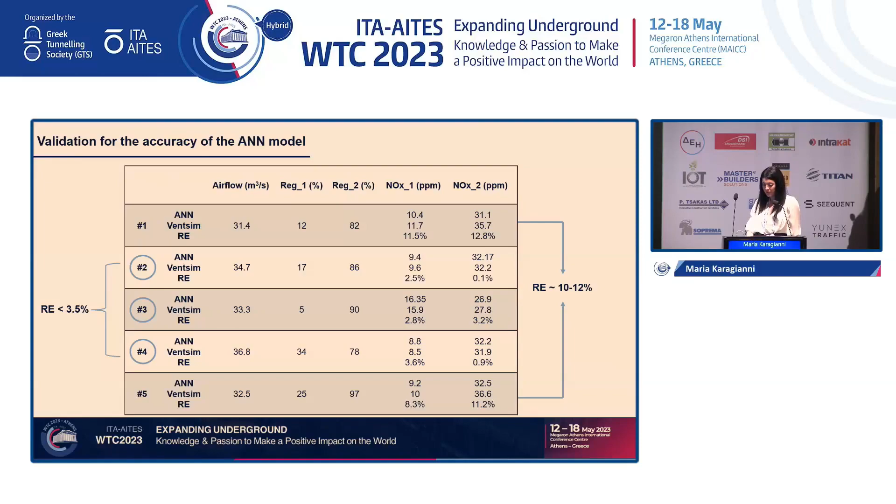So, to conclude, the ventilation of underground exploitations is an indispensable part of the whole mining process. Besides being responsible for health and safety issues, the ventilation system has a major role in the efficiency and productivity of the project.

ANN models have the ability to understand the complex nature of the phenomenon of gas concentration evolution, along with the ventilation's effect on them, and with their ability to generalize with a forecast accuracy of more than 90% regarding the state of the anticipated condition and gas concentration, they are classified among the best methods for future use.

The development of the methodology of this research proved that it is possible to utilize a synthetic database derived from a validated digital twin to gather the required data in the absence of real measurements. Such strategies can work well with machine learning techniques to overcome such issues and can assist engineers in adapting operating strategies and coming up with a flexible, yet resilient and autonomous, ventilation system.

The process can be further developed with the implementation of an autonomous ventilation-on-demand system that will constantly monitor and control the ventilation system of underground mines. This can lead to a significant improvement of the social license to operate by achieving both a reduction of the environmental footprint of the mines and an upgrade to work safety levels.